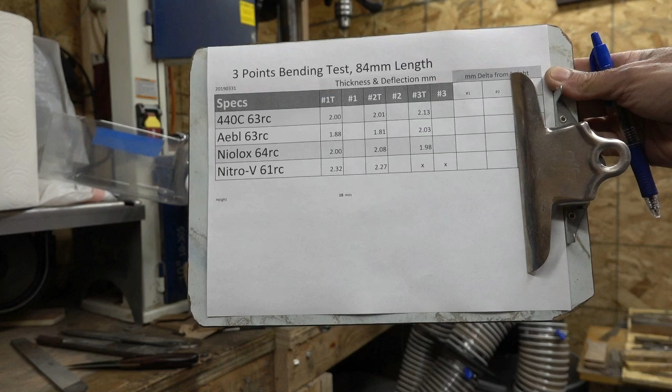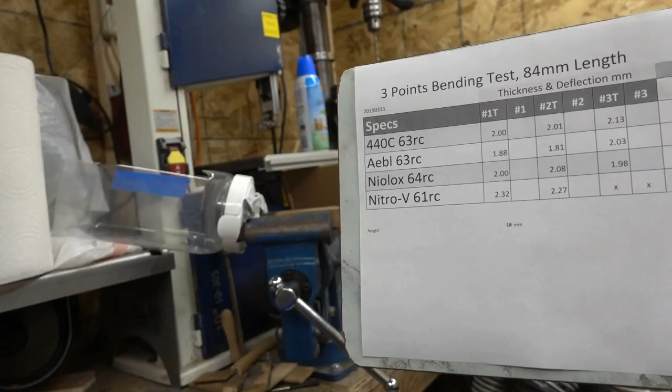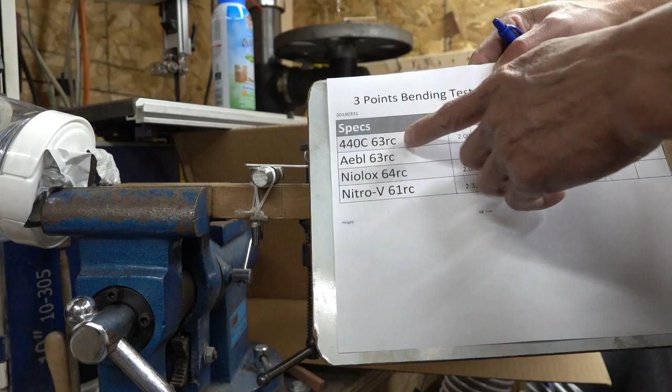Bluntcut Metalworks, March 31st, 2019. Today I'm going to do a 3-point bend test, and the explanation is, let me move closer to the setting, the length between this point to this point is 84 millimeters. The height from here to here is 18 millimeters. So when this pushes down, bending this bar, then at the break point I will measure the remaining and then subtract from the 18 to get the deflection.

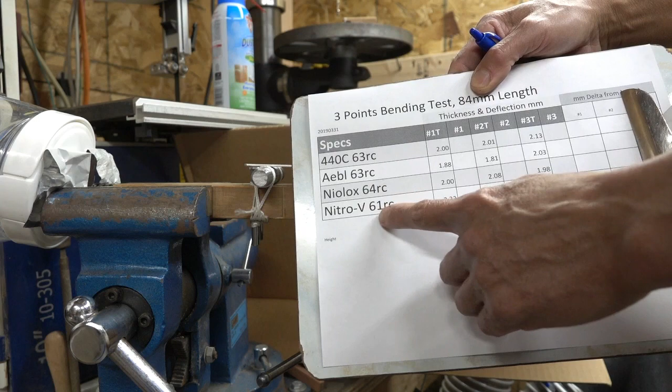And basically we are going to have 440C at 63 Rockwell, AEB-L 63 Rockwell, Niolox 64 Rockwell, Nitro-V 61. I did not get the correct hardness I want it to be. I like it to be 63 or so. And each of these has the thickness here. So right now what I got loaded is AEB-L.

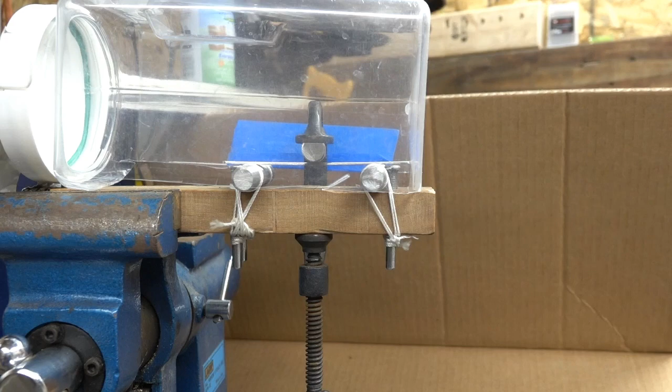Test piece number one. The thickness is 1.88 millimeters. And we use this caliper here to measure the height, whatever is left of it after it breaks. And so I will do one. The sample does jump, so I'm going to zoom in for you to see.

Okay, I will do one sample, and then for the rest, in the end I will put the spreadsheet there so you can see the result, and also the formula for calculating, if you were going to bend it 90 degrees, what would be the length required. And this bend test is a slow gradual bend. It's not like a knife where you flex it on a piece of wood or something.

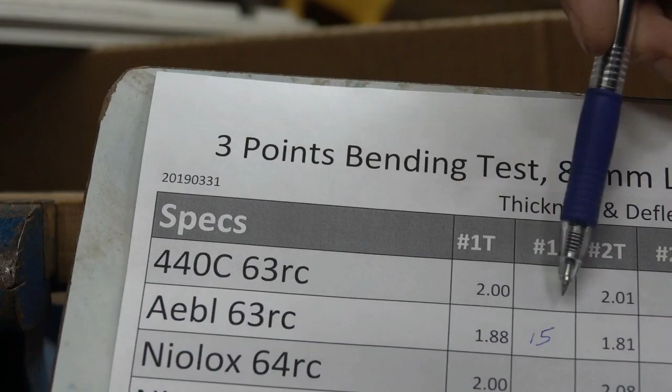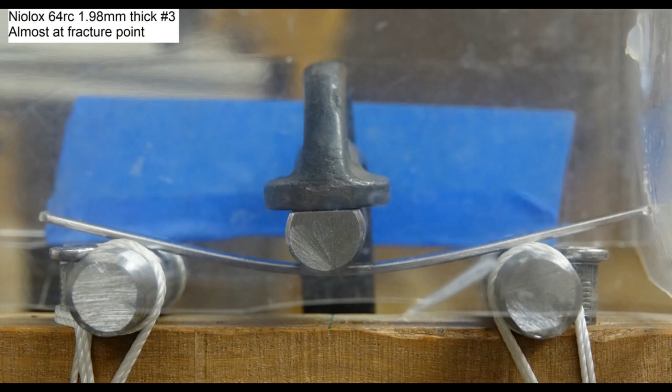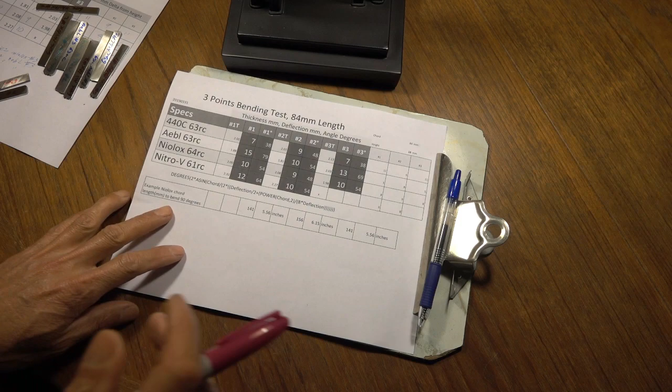I don't know if I can fit it in, let me pull up a little bit. 3 millimeters remain. So that's for the AEB-L. So I got 3 millimeters remaining, so I got 15 millimeters deflection. Let me put 3 here. So basically 3 remain, bent down from the top. The deflection almost bottomed out, because the thickness of the piece is 1.88 millimeters. All right, I'll see you in a bit.

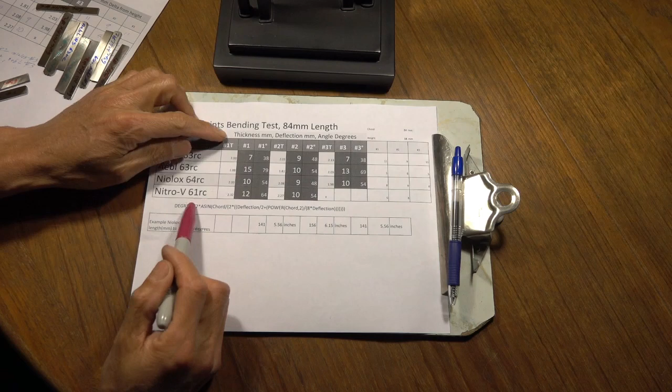All right, I'm back. It took a while to break all these samples, and I recorded the results. So let's review the summary here of the results.

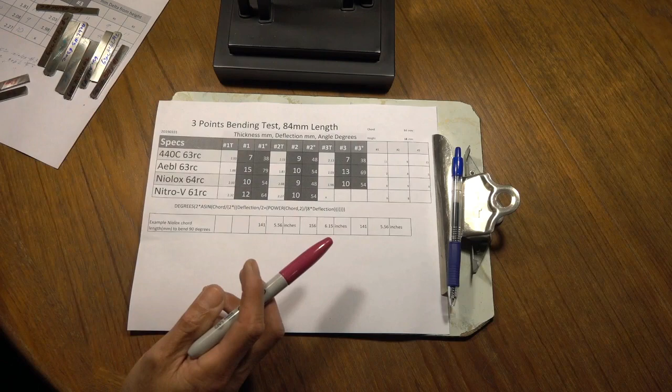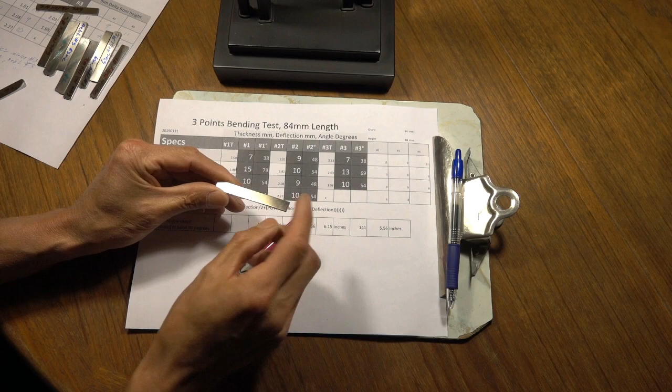All right. Here is a different column, and this is the thickness, the T for thickness. And so for the 440C at 63 Rockwell, the first sample, you can see here the thickness, number 1 here, the deflection, and then the angle, how far it bent, in degrees.

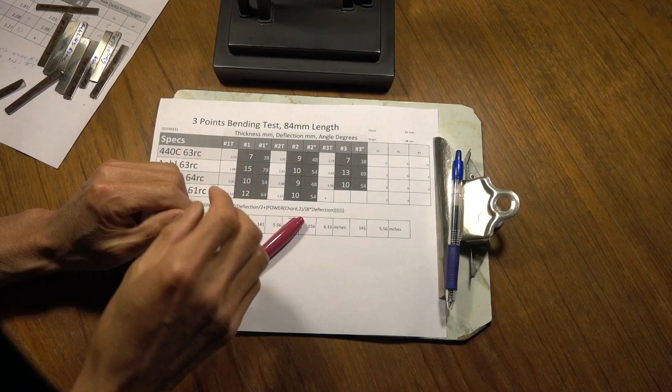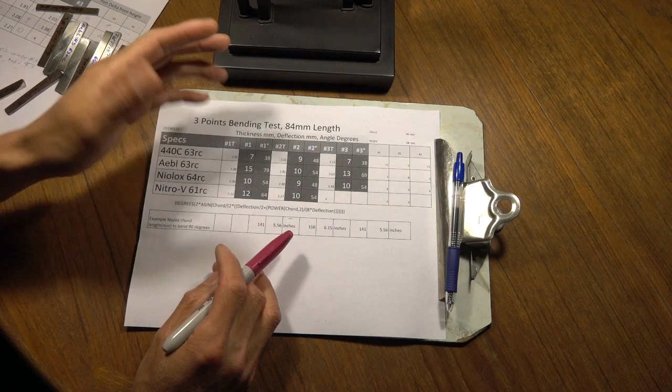So for 440C, you have to deflect for this length, 84mm. It can deflect 7 before it fractures. In other words, it goes beyond yield, into a little plasticity range, and then it fractures. And the second sample is 9. There is a variation because

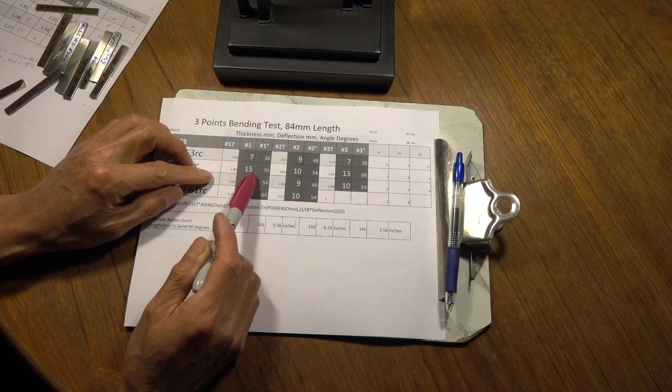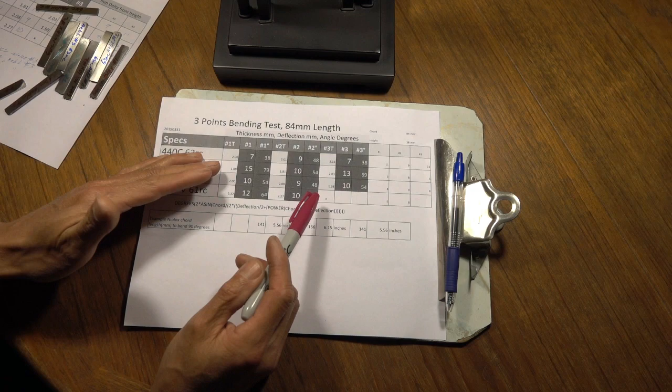again, as I mentioned, the finish is not consistent, and the dimension is not totally consistent, so there is going to be deviation, and also in the 3-point test, the angle of pressure differs. So basically, we can look at some sort of midpoint or average. That's all you can do. That's how I'm going to take it. So it's 9 for the second one, and 7 for the third one. In other words, this is how much it can bend in degrees.

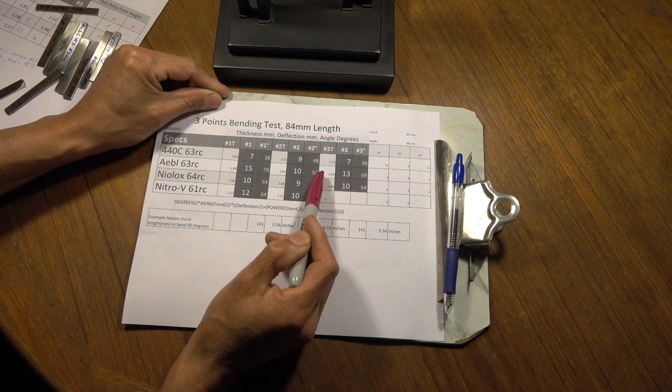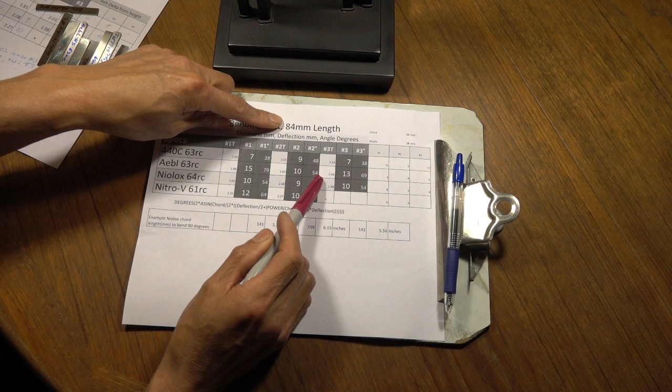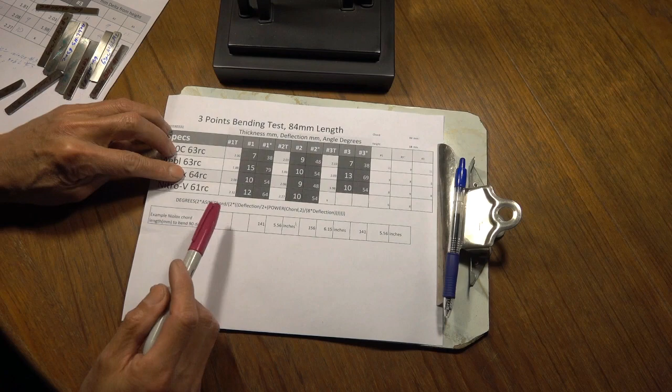AEB-L, the one in the first segment, in the beginning of the video, has an abnormally high bend. If I look at this, I would say, okay, something is a little off. So if you have a lot of samples, you want to get rid of the bias. That means the really high and the really low, because of probable error margin. So for this thing here, I said, well, this is actually a nice range.

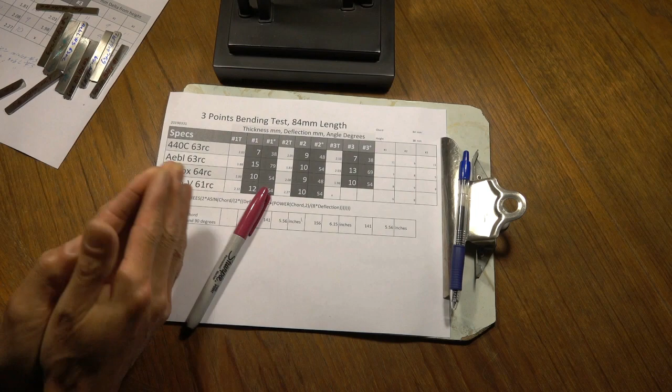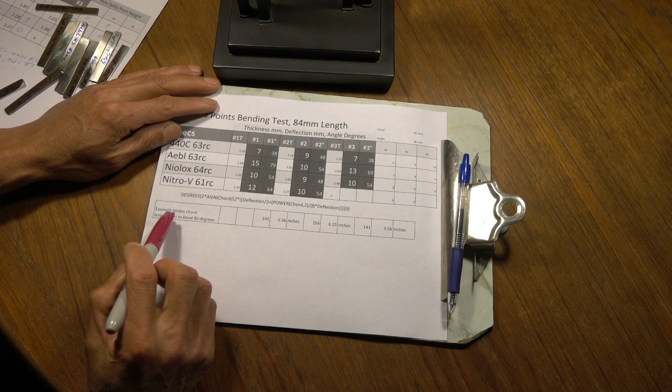So I could say for AEB-L at 63 Rockwell, it's reasonable to say it's 12, or 11 and a half if you're conservative. So in this case, for this length, 84 millimeters, it bends 50, 60 degrees, maybe 60 degrees. And that is a lot. And so for Niolox, 64, there's a difference in terms of hardness here, 64 Rockwell. This is one of my top choices in stainless, because the lateral strength is important to me, because that is stability.

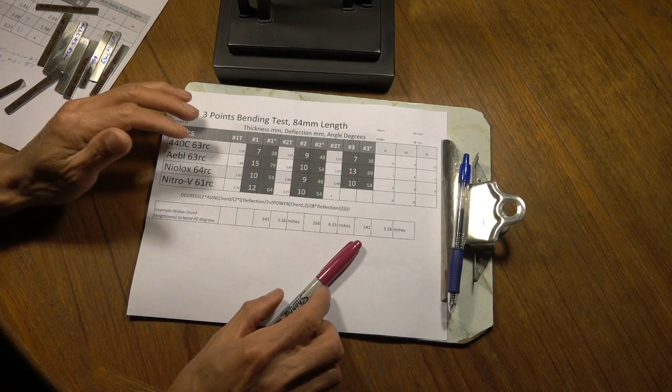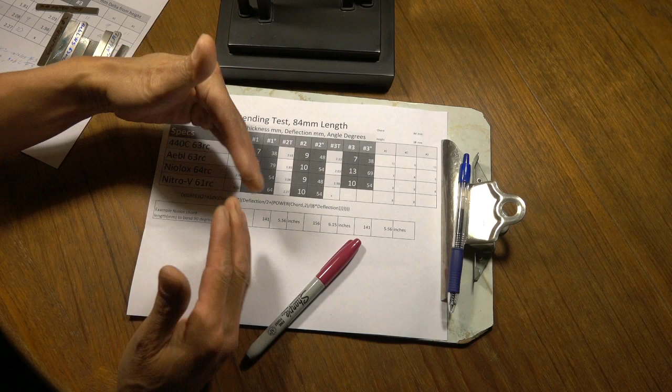And so for all these numbers in terms of deflection, if I pick the worst one, it's a 9 millimeter deflection. That is 48 degrees at fracture point, the point where it will explode. And then let's look down here at what the chord length needs to be so you can bend 90 degrees before it ruptures or fractures. In that case, I need 6.15 inches. So if I've got 7 inches long, I can bend 90 degrees

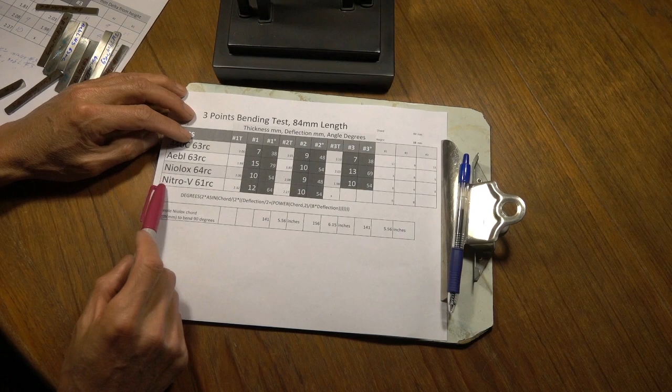without fracture. However, bending 90 degrees doesn't mean the elastic range. It's already entered into the plasticity range. That means when you bend it and then straighten it out, it will stay slightly bent. So that's what this example is for. But if I take the optimistic range, I only need 5.6 or so inches to bend 90 degrees. So that's Niolox.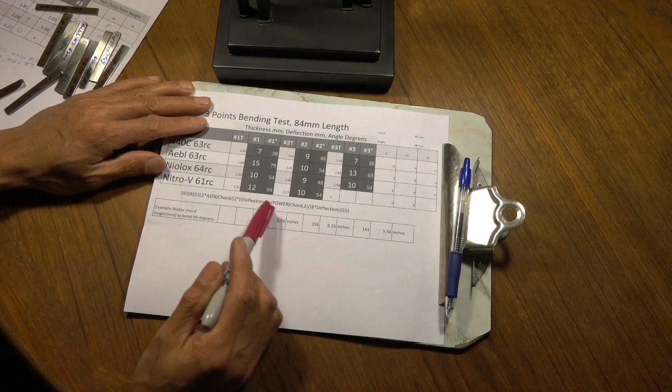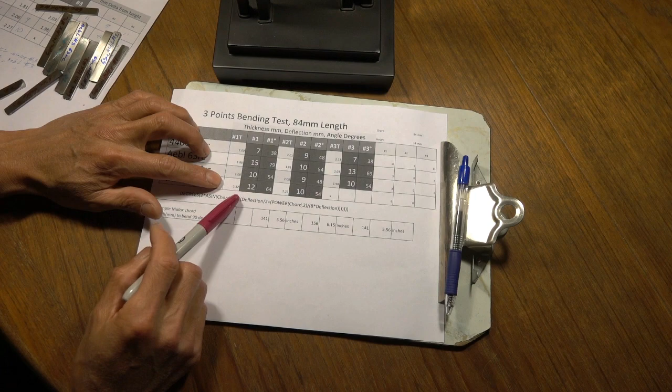Nitro-V, again, I repeat, I was not able to achieve the correct hardness, because I would like it to be 63, like AEB-L, but they were all heat treated in the same batch. So there's some data I need to look at to see why it actually got lower hardness. But anyway, I only have 2 of these bars. I've got more of these bars, I can do another set, even though from the same batch. But I broke some earlier, and also this thing is a little thicker.

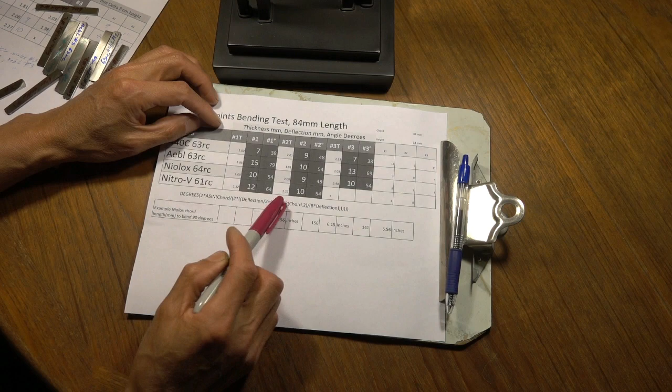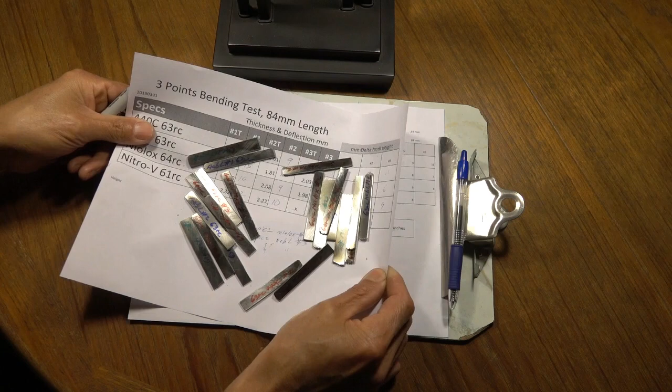You see the thickness number here. The thicker it is, the less it bends, because again, it's compression and stretch. The stretch is the one that doesn't support very much, because you can neck the steel to a certain point, and then it will fracture. But from these 2, I can say if it's 11, then it would be a 58 or 59 degree bend angle. So that's a lot more, even though it's 61, that's why I compared 61 to Niolox here.

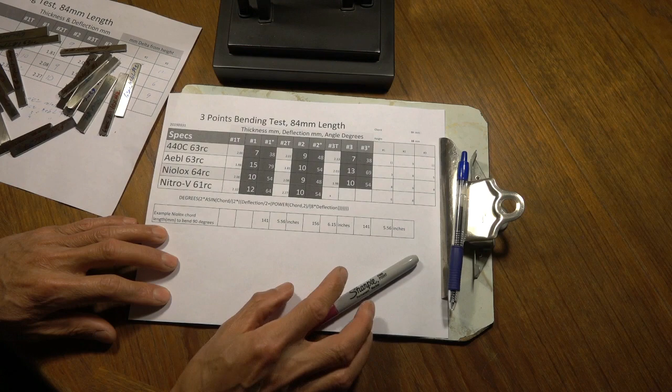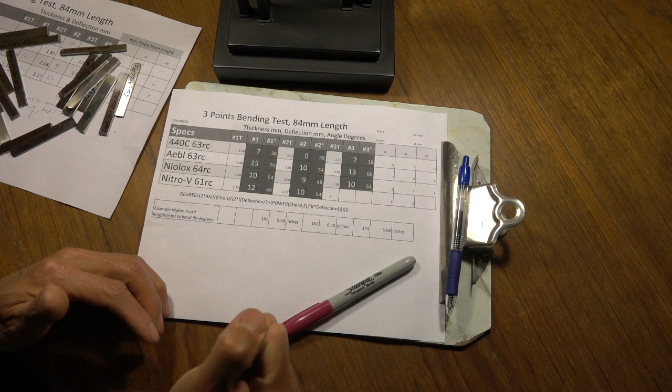Anyway, you can see all the bends, and for most of these broken samples, I used a hardness tester and retested them to make sure that near the breaking point and the bend point, the hardness is actually as stated, and they are consistent. This one is a little off, so I think I would toss it out, because when something is too good, maybe some data is a little off.

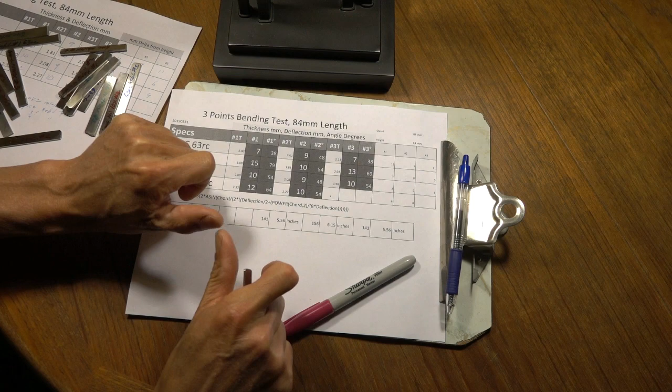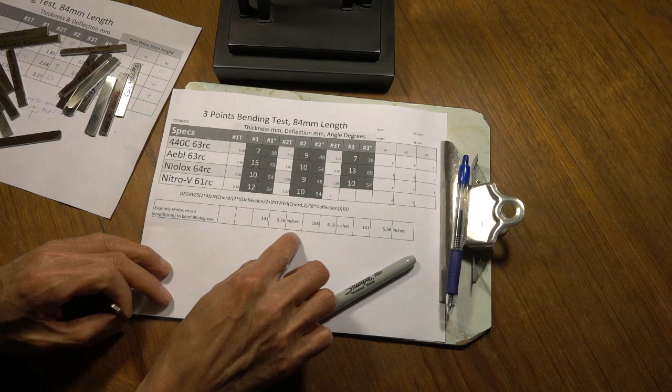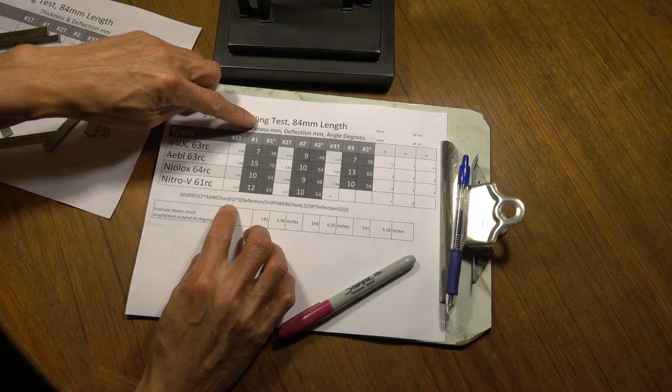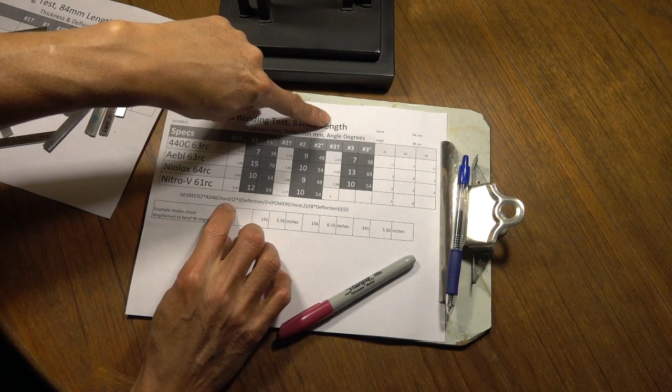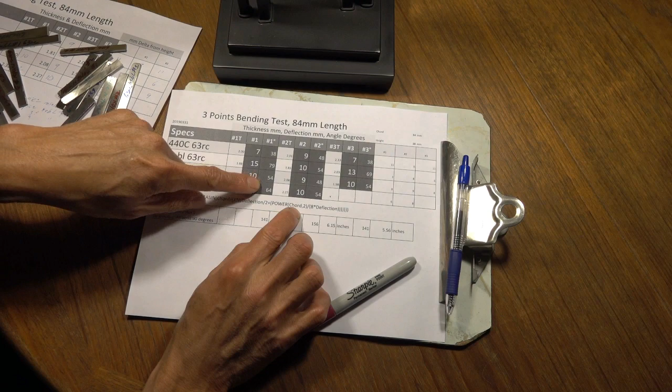If you bend like this, that is not the same thing as this 3-point bending test, because you actually have a very narrow area where you're holding it. This is 2 points right here and 1 point here, so it's actually a much shorter length. So the bending angle is more extreme. Keep that in mind when I discuss these things, because this test is more controlled, so you can see what it's like.

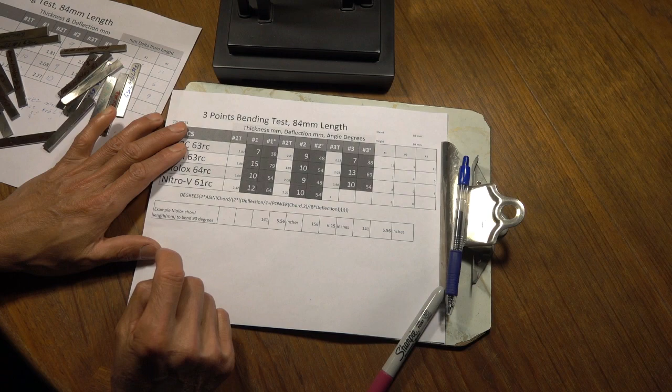Anyway, to calculate the degree, you take the length, the chord length, which is 84 millimeters here, and the deflection is how much it deflected. In this case, for this Niolox, it's 10 right here, and then you have the chord length squared, divided by 8 times the deflection. This is a standard geometry calculation. I calculate the arcsine, and then I translate from the arc into degrees. Anyway, here's the formula. All right, well, thank you for watching.